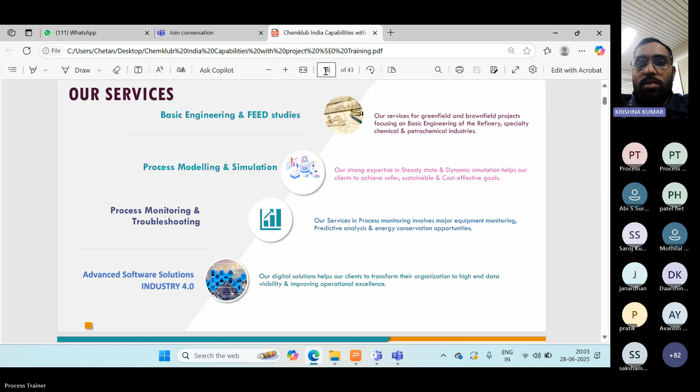So I'll start with the presentation for which we have gathered today, which is on fire and explosion concept and prevention. When we talk about the chemical industry, fire is one of the major causes of many big incidents, which have caused many fatalities, property damage, losses to environment, and legal troubles for many organizations. Today we are going to understand the causes of fire and explosion, the difference between fire and explosion, and the preventive measures we need to consider to prevent such incidents.

Let's get started. First of all, what is fire? To be really fundamental, it is a chemical reaction. It is a combustion process wherein the material is converted to byproducts, which are oxidation products of that reaction, mostly converted to CO2 because carbon is contained in most chemicals, and when it is oxidized, it converts to CO2, releasing a lot of heat, which causes damage in terms of burning of material and burn injuries to people exposed to it.

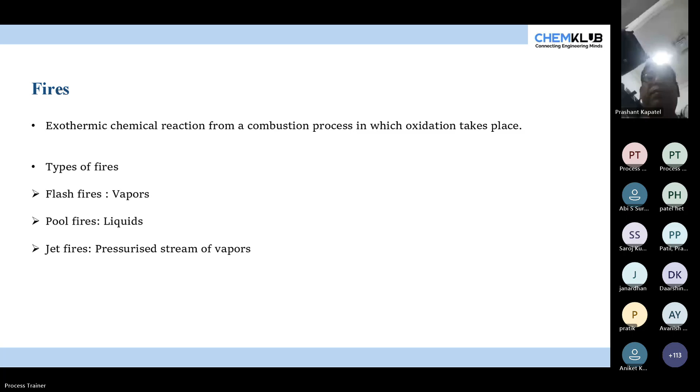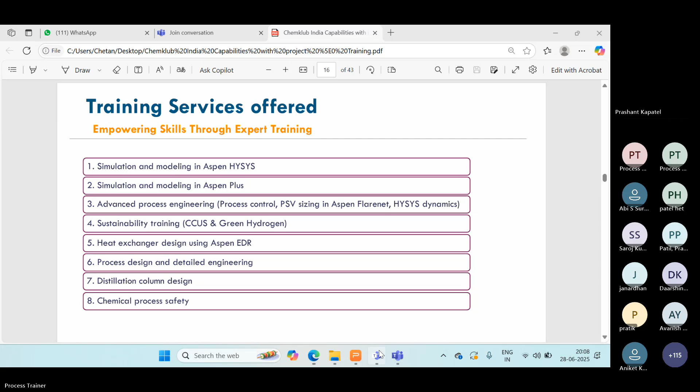Sir, you are on mute. Hello, hello, am I audible? Yes. Yes sir, yes, you are audible sir. So you didn't hear anything till now? No, we were hearing that after the flash fire and the pool fire. Oh okay, so till what was audible? The difference between flash fire and pool fire?

Yeah, yes, we got to know that.

So basically, flash fires are less dangerous than pool fires because of the extent of damage they can cause. In pool fires, if you have a pool of liquid continuously giving fuel to the fire, it increases the severity because it collapses the structures containing other flammable materials, and those contents add to the fire.

The fire basically spreads, causing additional damages. In jet fires, it is basically a pressurized stream of flammable vapors coming out from, say, piping or a pressurized vessel, from a gasket, which are ignited, and then you can see a jet of fire getting out of the vessel.

Now when this jet comes out, it contains a lot of heat and energy, because it has high velocity as well as heat. So impingement or impact of this jet on another structure or equipment is really dangerous, because it can give a similar effect to that of a gas cutter. You might have seen gas cutters used for cutting metallic structures. These jet fires do the same to the structures they are exposed to.

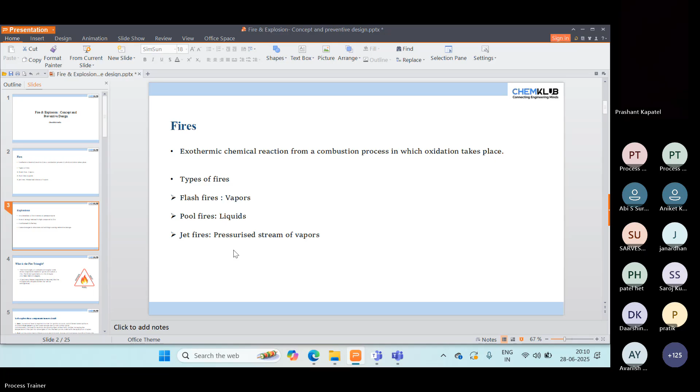Then what is an explosion? Explosion is an after-effect of fire in terms of a pressure wave. The difference between fire and explosion is, when something is burning, it is burning at a certain rate. But in explosion, that rate is very, very high.

Sir, you're not audible. I don't know whether somebody's muting me.

Okay, so rate of energy released is very high in case of explosion compared to fire. In case of explosion, confinement is the key. If you have flammable vapors or a substance which is combustible in nature, and if it is confined from all sides and then ignited, it can convert from fire to explosion and cause a lot of damage, because it has higher energy. One unit is basically heat release per unit time, which is very high in case of explosions. Because of that, pressure waves are generated, which actually rupture the equipment holding the flammable material.

And the pressure wave also disturbs or destroys the structure surrounding that equipment, which again causes the domino effect.

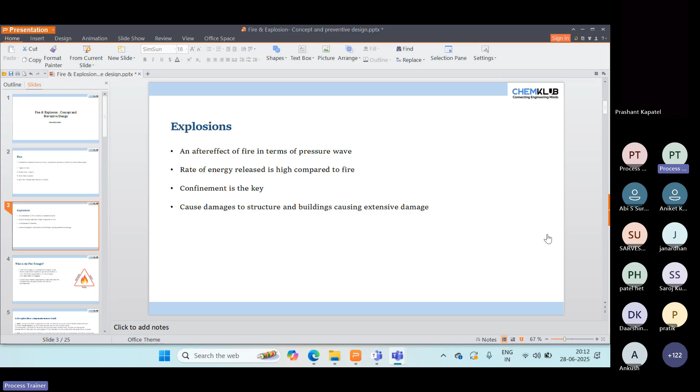Then maybe you guys are aware about the fire triangle, wherein...

I hope my screen is visible, right? Yes sir, your screen is visible. Is it possible to put it in PPT mode? I'm not putting in PPT mode because I'm not able to see when it is muted. Then somebody of you has to take the responsibility that once it is muted, somebody will give a shout out. Is it okay with you? Yes sir, no issue, that is possible. Okay, fine.

Okay, so the fire triangle consists of heat, oxygen, and fuel.

Please mute now, I'm not able to see whose mic is going on. So everybody should mute themselves.

Okay, thanks. So the fuel in this case can be solid, liquid, or gas. Solid like wood, paper at your home can burn. Gasoline, diesel, methanol, benzene are examples of liquid fuels, and gases like hydrogen, acetylene can burn. And those are all examples of fuel.

If you consider the ability of fuel to catch fire, then gases are more sensitive, and the parameter which determines this is called minimum ignition energy. So if you compare minimum ignition energy for gases, liquids, and solids, for solids it is quite high. For liquids it is sometimes between 1 to 3 millijoules, or sometimes above 3 millijoules, and sometimes less than 1 millijoule. For gases it is extremely low. It is said that a simple single static charge can ignite hydrogen.

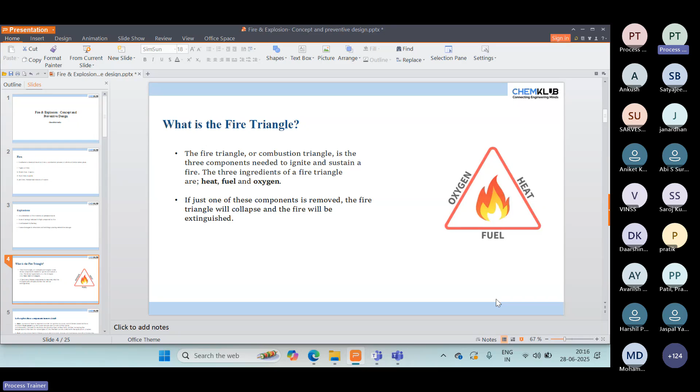So when there is a fire, you might have seen people rushing with a fire extinguisher. Depending on the type of extinguisher, they are removing either oxygen or heat. If you are using water, you are actually removing heat. When you are using chemicals like CO2 or foam, you are basically covering the surface of the fuel so that atmospheric oxygen does not come in contact with it, and the fire is stopped. So this is basically breaking the fire triangle to collapse the fire.

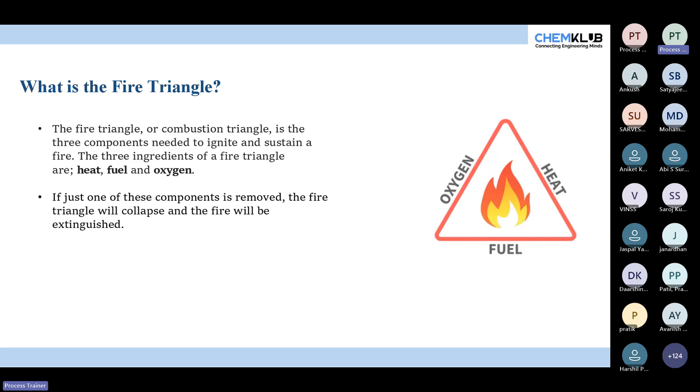This is true for all the chemical plants which we are running, and there is always a possibility of fire because of the presence of flammable chemicals. Some chemicals are above their flash points, and because of that they are in the flammable range. So the only option remaining is oxygen. Also they need an ignition source along with heat. So we have to control either oxygen or ignition source to prevent fires from happening.

Now how do we do that? Let us check it ahead.

So why is heat a component in the fire triangle? You can think of heat in two senses. One, heat is responsible for heating the material to a temperature wherein the vapors are sufficient so that it is ignited. You might be aware of the concept of flash point. It is a temperature above which the material can ignite, below which the fire doesn't take place. So some heat is required to shift the material from its non-ignitable or non-flammable zone to the flammable zone. And even when the liquid is above its flash point, it will not catch fire automatically. It will again need some ignition source, and that is also possible through heat. Those ignition sources we are going to discuss in detail in the upcoming slide.

The next component is fuel itself. The material which is getting burnt is basically the fuel. This can be a solid, liquid, or gas. The third component is oxygen. As we started the presentation with the statement that fire is basically a combustion reaction which needs carbon and oxygen - carbon is present in fuel and oxygen is supplied through atmospheric air - if we remove oxygen, there will be no fire. So this is what we do to prevent fires from happening.

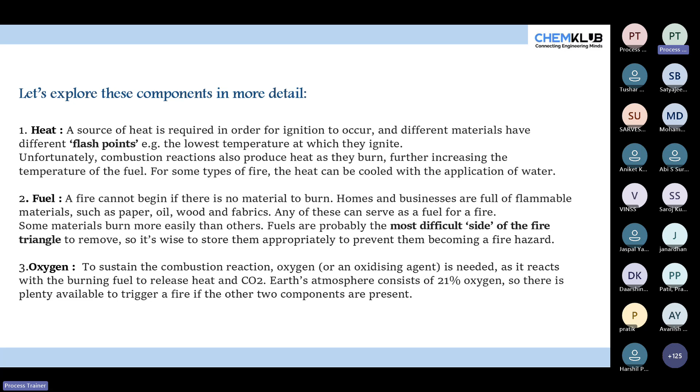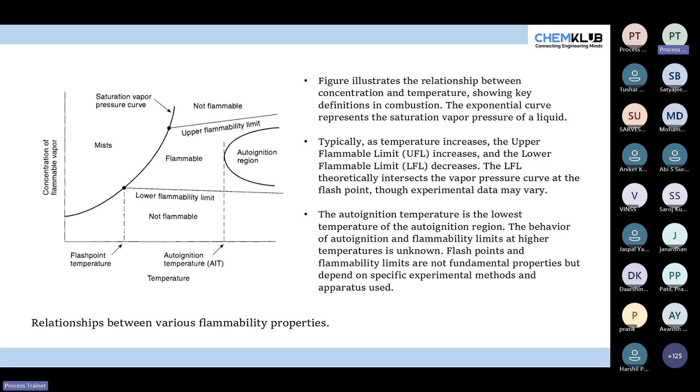Now the relationship between various properties. You can see on the x-axis there is a temperature called flash point temperature. It is the temperature above which the liquid gives off sufficient vapors so that it can be ignited when there is an ignition source. And further right you can see auto ignition temperature.

It is the temperature at which... your video is off. We can't see the screen. Let me know once it is visible. Is it visible now? Okay, now we can't visible, see. Maybe I'll keep it in this mode so that I can see it.

So as you can see on the left hand side, it is flash point, and on the right hand side is auto ignition temperature. Auto ignition temperature is basically the temperature wherein you do not require any ignition source - it will ignite on its own. And this temperature is quite higher compared to flash point.

For example, the flash point temperature of solvents might be less than even room temperature, but their auto ignition temperatures are of the order of 250 or 300 or 400 degrees centigrade. So there are two aspects to it: when the material is above flash point, we have to prevent it from getting an ignition source, and we have to make sure that we don't get a source which can cause a temperature higher than auto ignition temperature, which is taken care of by means of the temperature class of equipment.

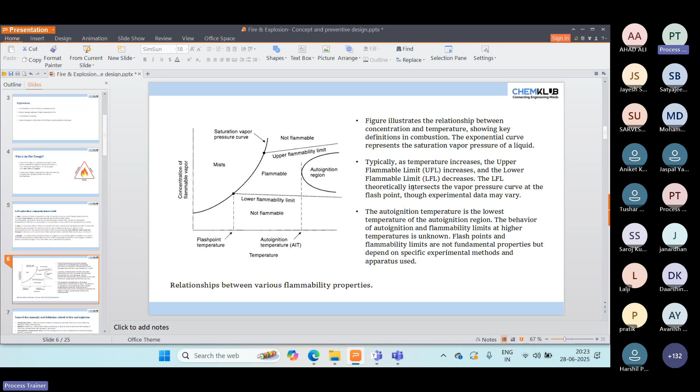So what do we do when the temperature is above flash point and we still have to use it? How do we prevent fire in that case?

I guess I explained all these terminologies to you except fire point. Fire point is the lowest temperature above which the vapor will catch fire and sustain the fire. It is basically a higher point compared to flash point.

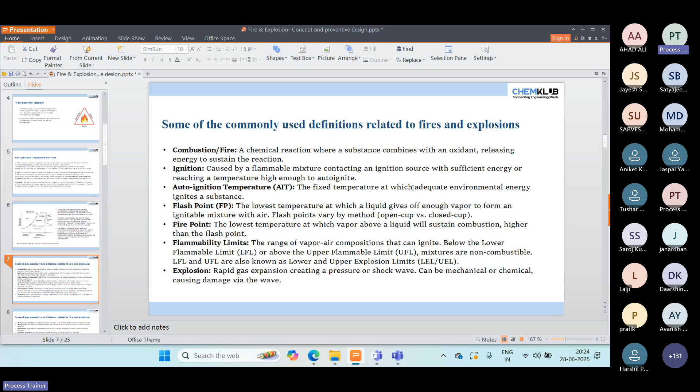We actually never rely on fire point for safety purposes. We always prevent based on flash point. If the material is above flash point but below fire point, we still consider it as flammable, because we do not always have control on the ignition sources.

Let us understand the difference between detonation and deflagration. When there is a fire and subsequently an explosion, this flame front can travel either slow or fast, depending upon various properties of chemicals and the geometry of the place where the fire has started. Based on that, the explosion can be divided into two types: deflagration and detonation.

Deflagration is the fire or explosion wherein the flame propagation speed is lower than that of sound, so it is in the subsonic region. In case of detonation, the speed of the flame front is higher than the speed of sound.

Detonation is obviously more dangerous because the flame front is running at a very high speed, so the fire is propagating very fast. The gases generated because of the fire are traveling at a very high velocity, which creates a pressure wave and damages structures.

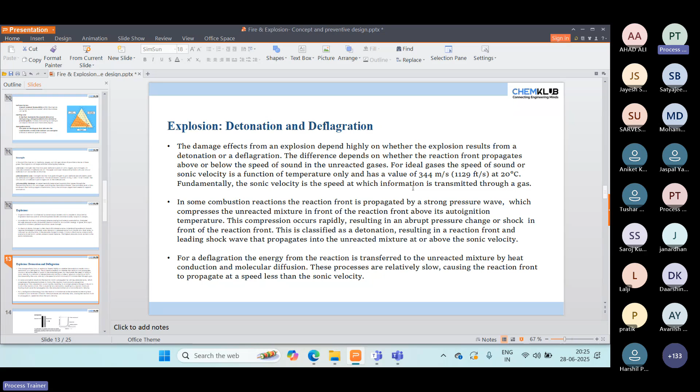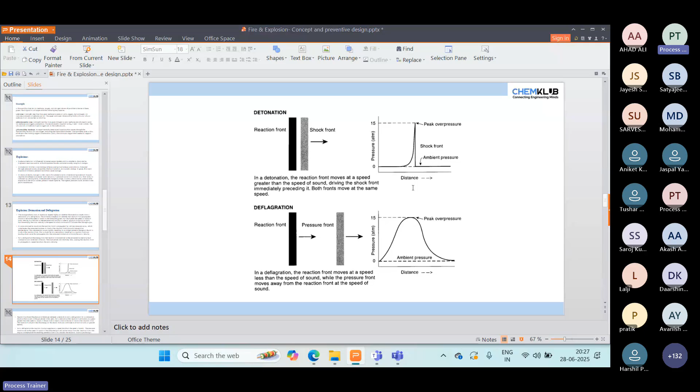If you can see, the peak is very sharp. So the distance at which this occurs, it will get a lot of pressure suddenly. You can call it dp by dt, rate of pressure change per unit time, which is very high in case of detonation. This creates impact on structures and damages them, causing a lot of damage. Whereas in deflagration, though the peak overpressure is the same, it will not impact the structures as much as detonation.

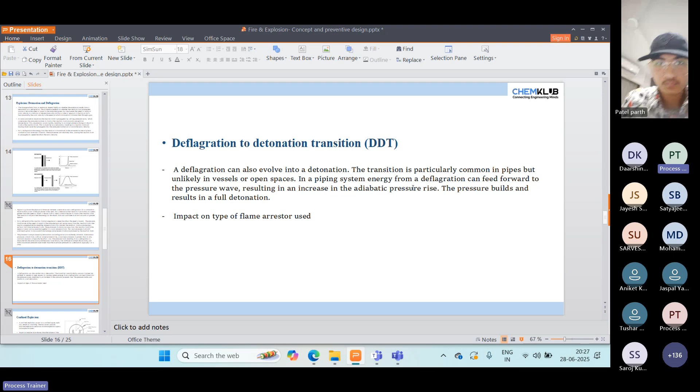So can deflagration convert to detonation? Yes. How can it convert? When deflagration is going on, it is not a stable thing, not like a bike running on the road. It is more like a jet plane cruising in the sky, traveling already at a very high velocity. So if it gets some geometry where the speed increases, the flame propagation will increase because of confinement, because of lower pipe diameters, then deflagration can convert to detonation, and the damage would be higher.

Now why is it important for us to know whether the flame or fire will cause deflagration or detonation? This is relevant when we choose flame arrester types. There are certain flame arresters which prevent only deflagration, and there are certain flame arresters which prevent detonation as well. So whenever we select flame arresters, we should be aware what kind of pressure rating it should have. Otherwise, if we select a flame arrester for the deflagration case and detonation occurs, that flame arrester itself will get damaged and will not do its job of preventing the flame from entering the reactor.

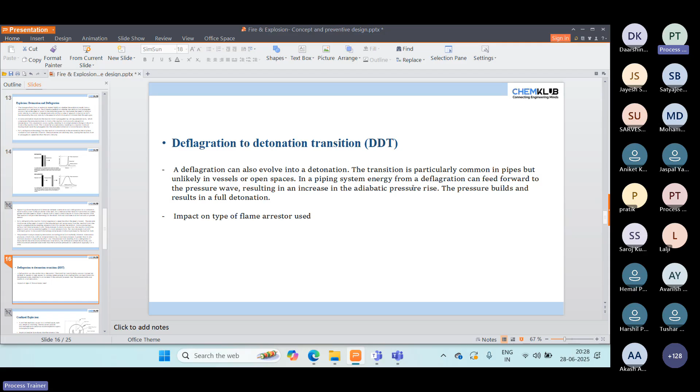Now what are the ignition sources responsible for fire? As we talked about the fire triangle - oxygen, fuel, and ignition sources or heat - heat is given in terms of ignition sources. These ignition sources include hot surfaces. Examples of hot surfaces are, say, a hot plate, like you might have seen in laboratory, a plate provided with an electrical heater that gets hot - you might have used this in college or your organization's lab. If this hot surface gets in contact with a flammable vapor, and the temperature of the hot plate is higher than the auto ignition temperature of the fuel, then this can cause a fire. These hot surfaces are also possible in hot works like cutting or welding in plants. These can cause fires if they get a flammable atmosphere around them. That is why when we do hot work, we ensure there are no flammable vapors surrounding the area.

Can somebody share what test we do when we do hot work in the plant? What do we check? Anyone? Somebody raised a hand some time ago.

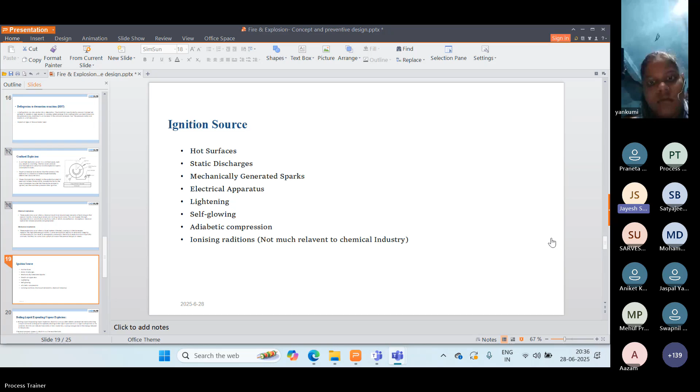Now when somebody touches that person, what actually happens? Why does he get that tingling sensation? Why does it create sparks? The static charges flow through the other person who touches the sitting person, due to friction and free flow of electrons, because there are different charges on both objects - one has one charge and the other has a different charge.

I'll put it in technically correct words. When the person touches him, he is actually grounded - in contact with ground - and electrical charges always try to earth themselves, finding a conductor to take them to ground. When the person is sitting on the chair, all the chair legs are plastic, so there's no way for the charges to go to ground. When the person touches the one sitting on the chair, the charges jump onto that person to find a path, and if he is grounded, they pass through him and get grounded. That is the path of electrons, and that is why he feels that electricity - electricity is basically flow of electrons. Those electrons pass from the person sitting on the chair to the person standing, and through him reach ground. That is how the charges flow.

Because those charges jump from the person sitting to the person standing, there is a spark. If you don't touch with a finger but put your palm on him instead, you might not actually get a spark, because it needs a sharp object to get those charges jumping - the area should be small, so that the motion of electrons is sudden and restricted, converting it into a spark.

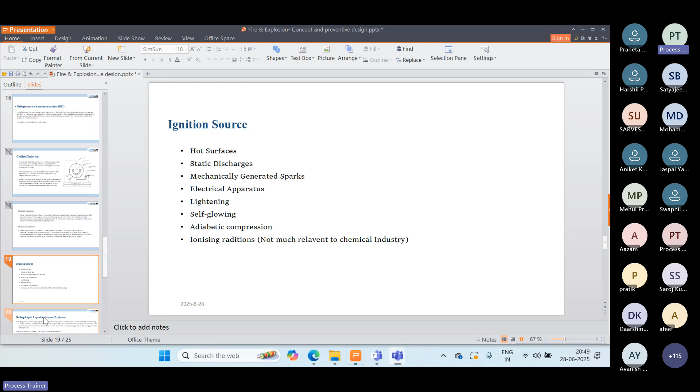Okay, so let us go to BLEVE. What is BLEVE? The full form is boiling liquid expanding vapor explosion, and this is also something not in our hand.

Whenever there is a fire outside, say a reactor wherein solvent vapors are filled, solvent such as toluene, and the reactor gets heated from the outside, the toluene will get heated and reach a point where the tank becomes pressurized. Because of this increase in pressure inside the tank, the remaining liquid toluene will not boil off, but will stay at a temperature above its atmospheric boiling point. Because of the pressure under which it is stored, it remains in the liquid state. In case there is a leakage from, say, the bottom wall...

...or a flange located in the bottom area of the tank or reactor, there will be a leakage of toluene at a temperature above its boiling point, but it is in the liquid state because of the pressure. So when it comes out of that leakage, it converts into gas, and as it reaches atmospheric pressure it expands, exerting a lot of pressure on the flange it is leaking through. It will kind of blast, expanding exponentially from liquid to vapor state suddenly, and this is basically called BLEVE - boiling liquid expanding vapor explosion.

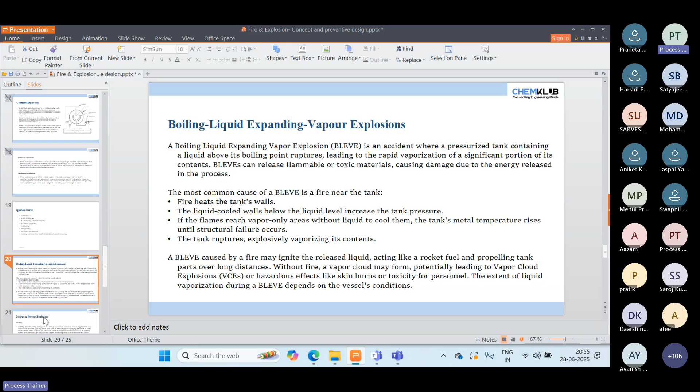So what do we do to prevent explosion? We remove one of the three components, right? So one method to remove one of the three components is to remove oxygen. We replace oxygen with nitrogen. Nitrogen has the inherent property that it does not burn and it does not support combustion. So there are various methods of inertization wherein we bring the limiting oxygen concentration below a certain level.

We bring the oxygen concentration inside the system below the limiting oxygen concentration. Now what is this limiting oxygen concentration? It is the concentration below which fire does not propagate in a particular material. It is a material specific property. So LOC for toluene, or limiting oxygen concentration for toluene, will be different from methanol or that of benzene. So it is basically a chemical specific property. It has been tested in the laboratory for this particular property.

So they try to reduce the oxygen and still try to ignite it. And at a concentration below which it is not ignited, it is called its LOC, right? And to take additional safety margin, we generally go to 50% of LOC. So for example, if there is a chemical having LOC of 8%, we ensure that the oxygen concentration inside that reactor is below 4%, not 8, to be very sure, to account for any errors, right?

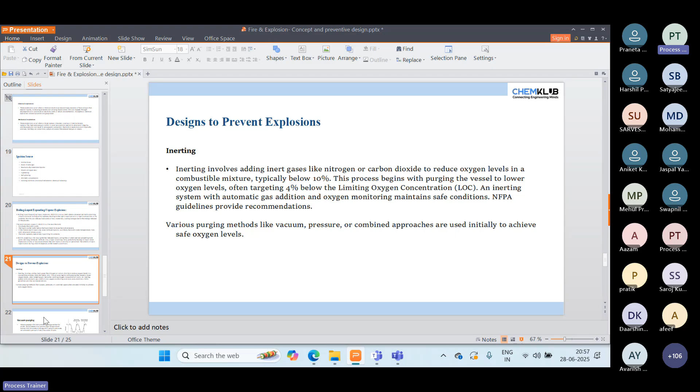So how do we do that? We do it by means of either vacuum purging, wherein we pull out the entire air from the system and then release nitrogen inside it, and again pull out the air and again release nitrogen inside it. So this is called vacuum purging. The reverse of it is pressure purging, wherein we put nitrogen inside the system, pressurize the system, vent it to atmosphere, again pressurize the system with nitrogen and vent it to the atmosphere.

Both these systems can be used to remove oxygen from inside the system, and there are equations from which you can calculate how many cycles are required, both for pressure and for vacuum, to bring the concentration of oxygen below a certain concentration. So for example, if you want to bring the concentration below 4% from 21%, how many cycles of nitrogen pressurization will you need?

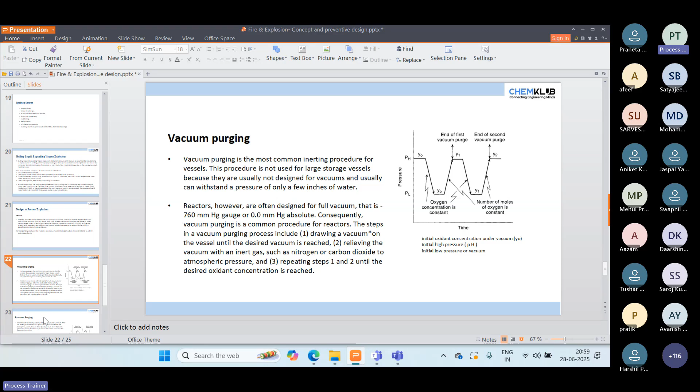That also varies with pressure. So higher the pressure of nitrogen, lower the cycles required, and lower the pressure, higher the cycles required. There are equations associated with that, and we also have a template wherein you can calculate the cycles required for your particular case, your particular chemical, as well as your pressure of utility, that is nitrogen, and you can then use it to safely inertize your system before you put in chemicals or take that particular material for preventive maintenance or any hot work. Okay, this is for pressure purging.

Now, how do we design against explosions caused by static electricity? We just discussed those things when we were discussing static charges. We have to control the generation because static electricity is everywhere. So you cannot eliminate it like you can eliminate oxygen by means of nitrogen. You cannot eliminate static electricity. However, you can reduce it, reduce the impact, and reduce the time for which it is generated.

So how do you reduce the generation of static electricity? By reduction of velocity. For example, if you are charging a drum with a flammable material, you can reduce the filling rate for that particular material. Also, you can dip the filling pipe deep inside the drum so that splashing does not occur.

So these are basically reduction in velocity and turbulence. This is how you control the generation.

And in the same drum, if you connect a conductor, you can call it a crocodile clamp or something, and connect it to the metallic part of it and then connect it to the ground, then you are allowing the charge to generate, but dissipating it also as well. So the accumulation does not occur. If it is not accumulating, if it is getting conducted through the crocodile clamp, then there is no problem.

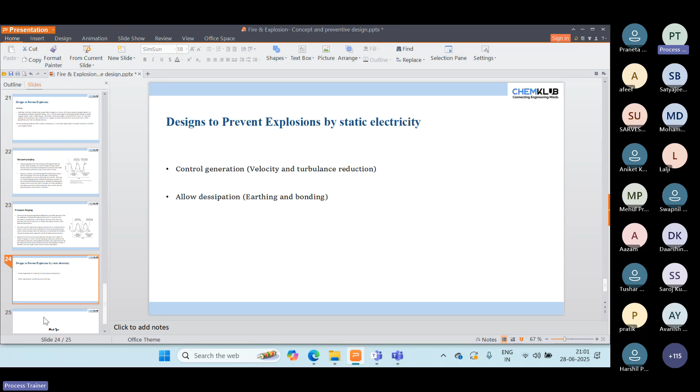Am I audible? Am I still audible? Yes, yes sir, yes sir, you are audible. So those who have a question can raise their hands. I think I will be able to see them.

Satyajit. Yes sir, so I have the question.

What is the engineering control to avoid static electricity? It is very common. As you said, the velocity calculation, 1.5 meter per second, we have to calculate. And if we are not, what are the second layer or third layer controls to provide, like you said, the dip pipe? So what other measures are to be provided as engineering control, not as part of administrative control? What engineering control will be best to avoid static electricity?

Okay, so for static electricity, as you shared, reduction in velocity is one option. Earthing and bonding is the second option, and dip pipe is the third option. This is sufficient to reduce static electricity. In case of tankers, if you have tankers containing flammable materials, relaxation time is also calculated, because in that case you might have to take samples, or connect a spool piece with the tanker and allow the material to come down. So relaxation time is also one measure which is used.